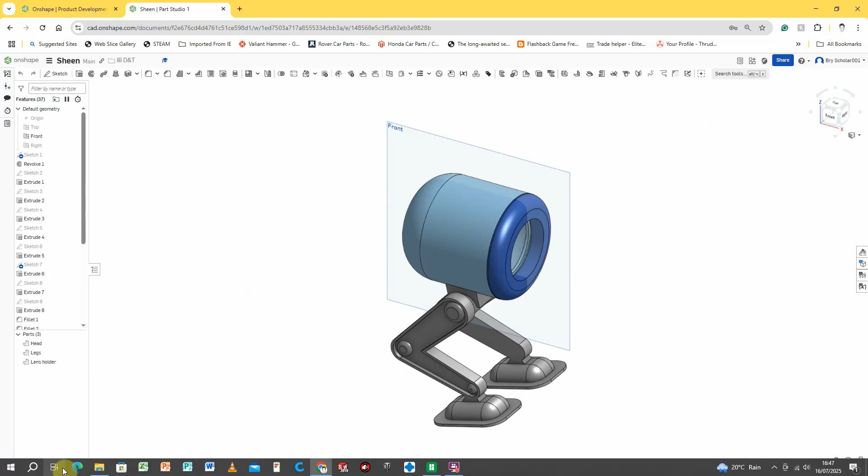In this video we're going to be taking the 3D model that we created in Onshape and putting it into the Bambu Labs slicing software so that the model could be 3D printed. So I've opened up Onshape and opened up the model that we had worked on previously. If you've left it on the drawings, go back to the Part Studio.

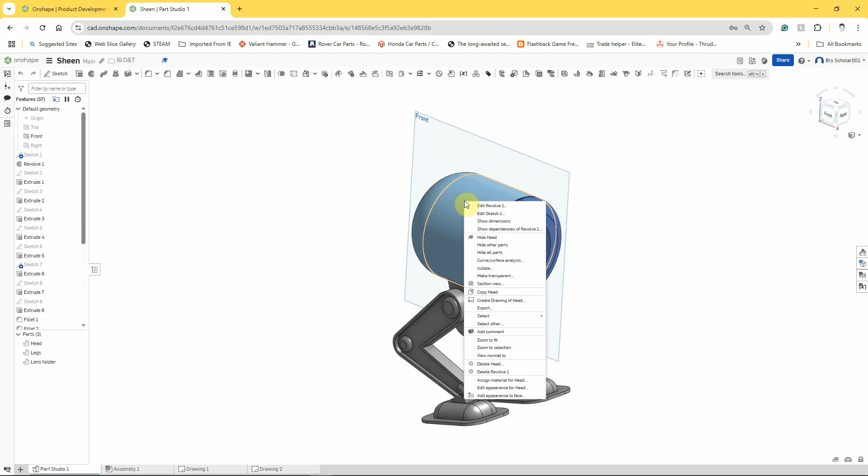And here's the model. So the first thing we need to do is export these model parts into files that the slicer software will understand. So we're going to use STL files, stereolithography files. So we can just right click on the part and select export.

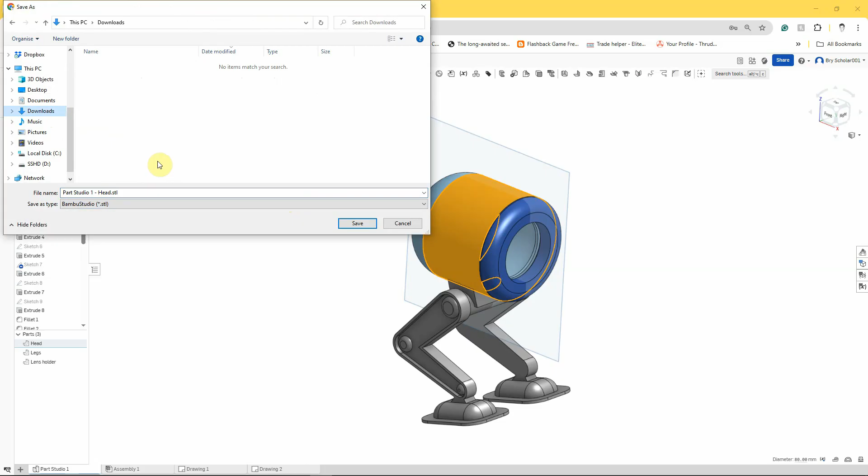And you can see that it tells us what the Part Studio was and what the part is. STL is the format, binary, millimeter, fine is fine. We can just leave the defaults there. We're going to export that and we're just going to put that into downloads and click on save.

And we can do that with the other parts, and I can also do it over here, so I can right click on legs and export and save. And do it again for the lens holder. So right click, left click on export, leave all the defaults and export that and save it.

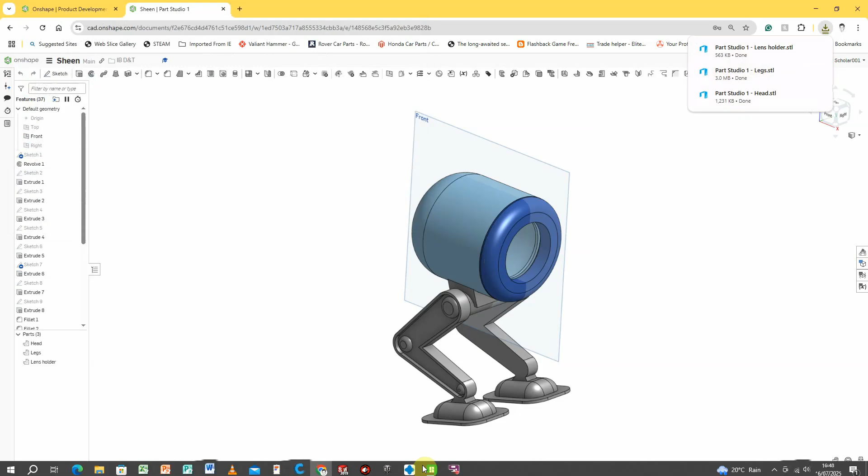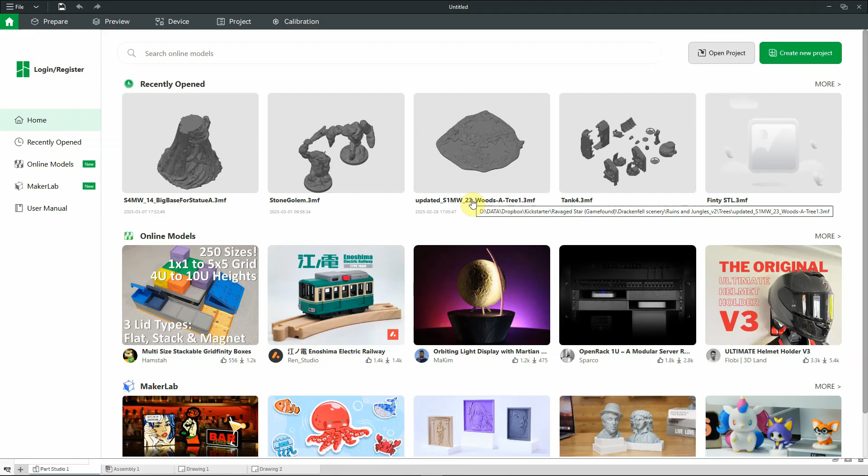So we're going to switch software now. We're going to go to Bambu Labs. I've opened it up. You would need to install this on your own device, or the school computers will have it pre-installed for you. Open up Bambu Labs software, and you're quite often greeted with this. Sometimes you get messages about upgrading and things like that. I'm just going to click on prepare, and that takes us through to showing us the bed.

Now the first thing to check is that we've got the right machine and the right materials set up. So we need to make sure we're on the Bambu Lab X1 Carbon with a 0.4 nozzle, and that we're using a textured PEI plate. There are some different choices, but you tend to find once someone's used that on the machine, the defaults will go to that. But it's just worth double checking, otherwise you might try and print something and it won't work on the printer.

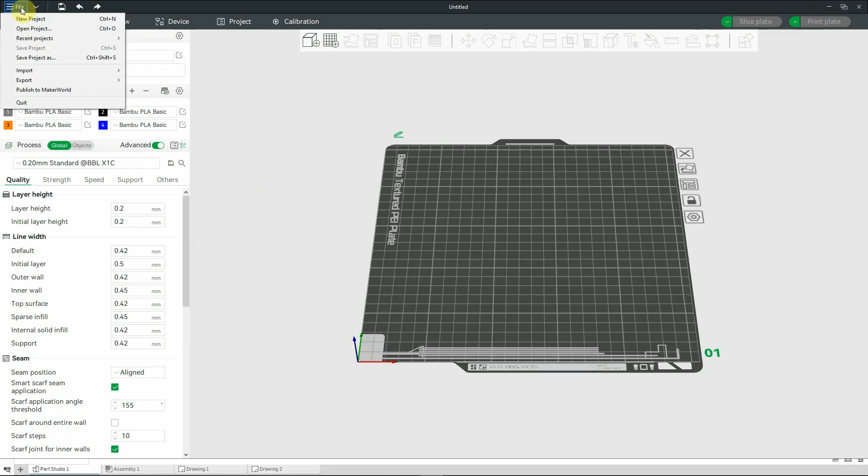So this is the bed, the build plate, that part goes into the back of the machine. This is at the front, and it shows where it will do a little nozzle check when it's printing. So we need to get the parts in here, and we can do that one of several ways. We can drag and drop them in, or we can go to File and import the STL files. So if we do that, we can actually select all three at the same time and go open.

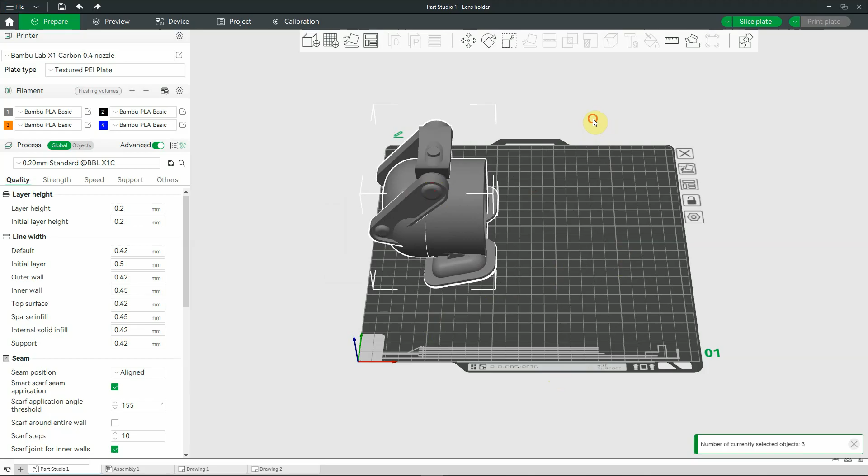If you do that, it says, do you want to create a single object with multiple parts? In this instance we don't. Sometimes it can be useful. So there are the parts, and they're all on top of each other. So I'm just going to left click out the way to deselect them, and then I can drag the three parts around separately. Unlike Onshape, you have to hold the left mouse button down to move this around. Those are the parts. What we'll first of all do is lay them down on the bed.

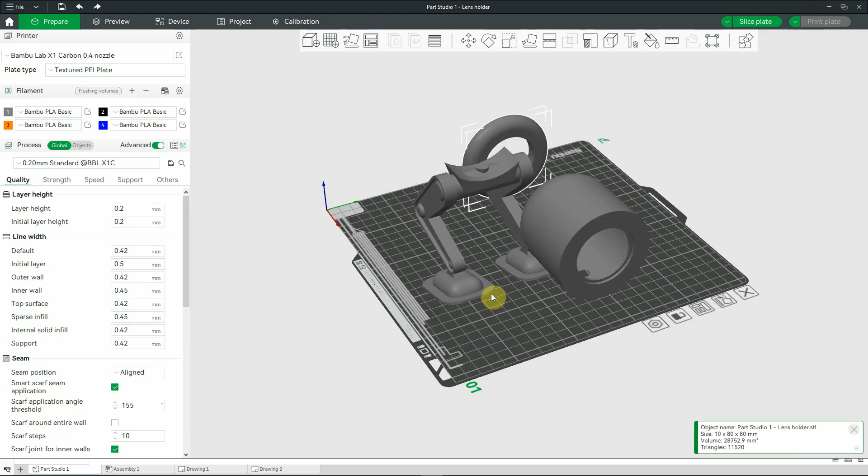Now when we're printing, there's quite often a compromise between strength, accuracy and speed. So depending on what we're after might depend on how we will lay the parts out, the orientation of the parts. Let's take this part as an example, the head. I'm going to click on this tool here, which allows us to pick a face to lay it on.

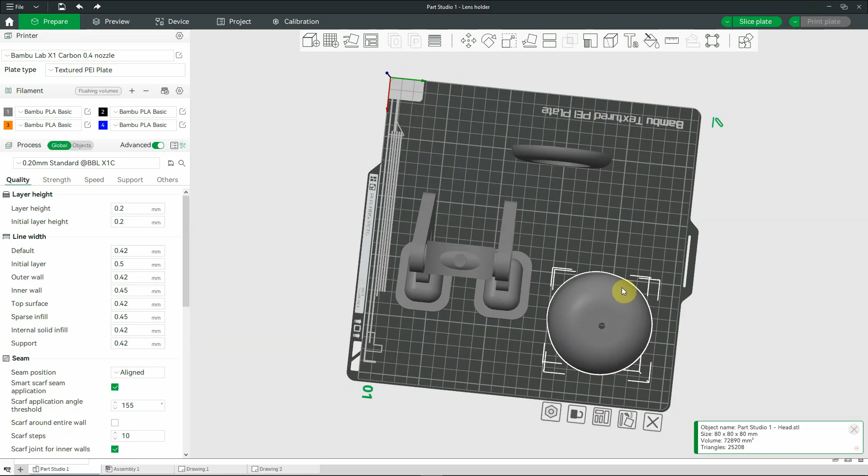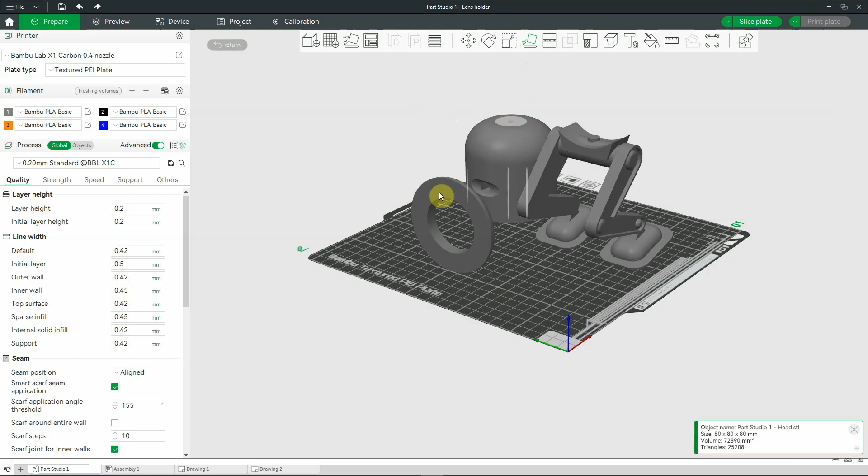It makes sense to put it down facing downwards, because we'll get the most accurate circle then. But what it does mean is it will be in lots of layers, and if it was going to break, it would break across these layers. But actually the material's quite thick, so that's not a problem. Likewise, it makes sense for this to be nice and accurate, to print it with this flat surface on the bottom. So again, I'm going to click on lay on face, select that part, select the face, click away, and I'm just going to scooch that over there, just dragging it.

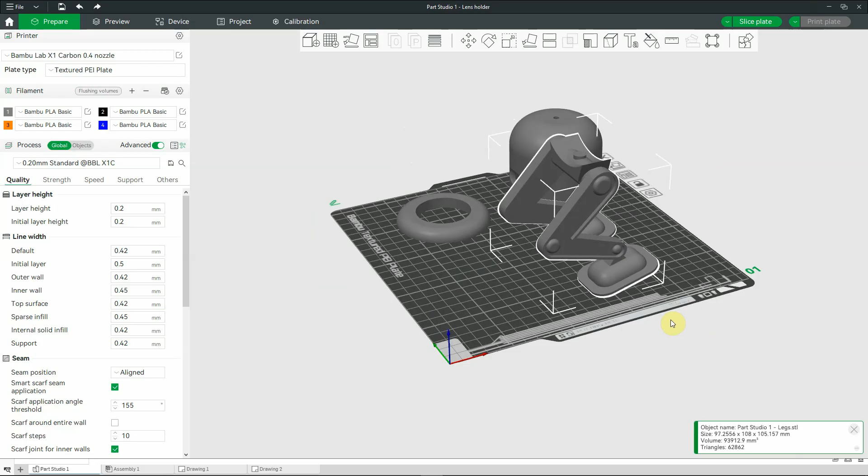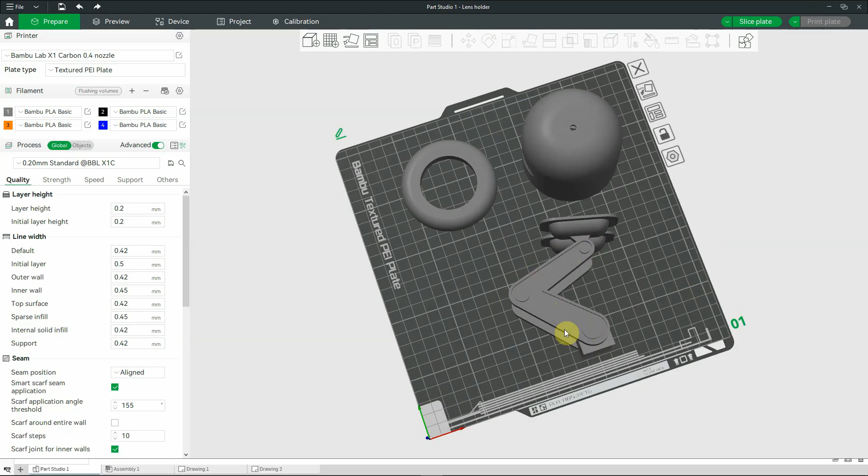And then the feet, this is a little bit more complicated. If we wanted to try and get maximum strength on these, we would probably want to orientate these so that they're lying on their side. So we'd probably want to print them in this sort of orientation. The reason being is that the printer will go around the profile of the legs, and this will give us a strong shape. However, for the purposes of speed and making things easy, we're going to print them with the feet flat on the floor.

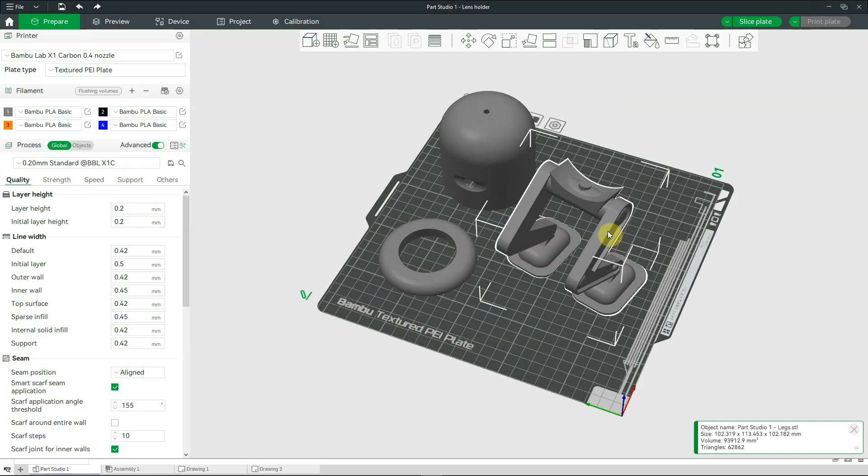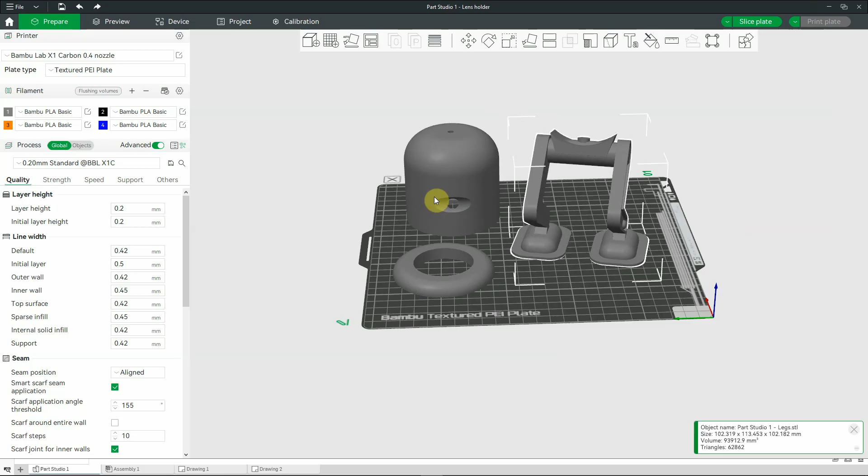So we'll do that, and I will just drag that over out of the way. Now you can see that sort of twisted around slightly. That doesn't matter really, but what this does mean is as it's layering, it'll be printing across these. Now if it was printing with layers going this way, this would be quite weak. I suppose the weakest part on here is going to be the layer across there, where arguably the feet could snap off, but this will print relatively quickly for us, and we're not going to be knocking this about a lot.

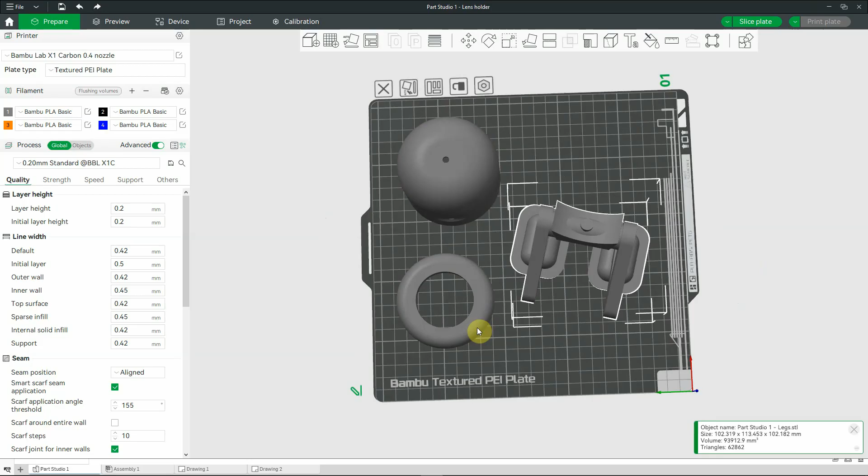If we were doing these as separate parts, perhaps if we were articulating them, in that case we might actually lay these down and build them on their sides and do them separately, but for the purpose of this, it's absolutely fine. So we've got our parts. We can just move that around with the left mouse button and look down, make sure that we're not interfering with anything. I suppose we could spin that around slightly so it looks a bit squarer. It's not going to matter, it'll still print okay.

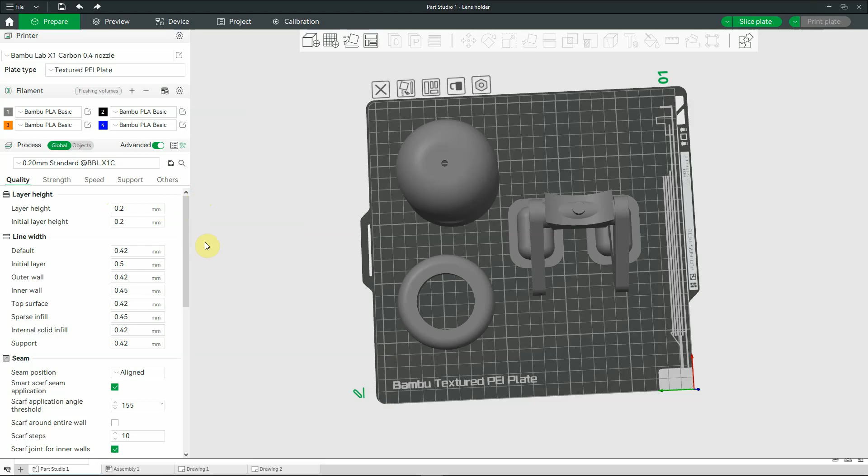So let's go over to the settings. Pretty much the default settings will work. In school we tend to use Bambu Labs PLA Basic as the material. That's a biodegradable material, and that works really, really well. It gives us some really good quality prints. We would normally stick to a layer height of 0.2 of a millimeter. We could go to 0.1 if we wanted a slightly smoother model, but that's absolutely fine. And pretty much everything else we can keep the same.

If we go to strength, we've got wall loops. Now, a 3D printer doesn't print things solid. It prints things by doing a skin. So if we take, for example, our head here, it will print an inner skin and an outer skin, and then it'll do a partial fill on the inside. And the standard fill is usually about 15%. So you can see on here, it's going to do a grid infill of 15%. That uses less material, but still gives a good amount of strength. If we want something really strong, we could increase the fill percentage.

And likewise, we can have more wall loops. So it's going to do 2 loops. It's a 0.4 nozzle, so the walls will be 0.8 millimeters thick. If we wanted a really strong part, we could perhaps do 1.2 millimeters, or go up to maybe 5 wall loops. So we'd have a 2 millimeter thick wall or skin for the part, but we don't need it for this. So we'll again leave it at the default. Again, the speed we can leave in its standard configuration, but support we might want to add.

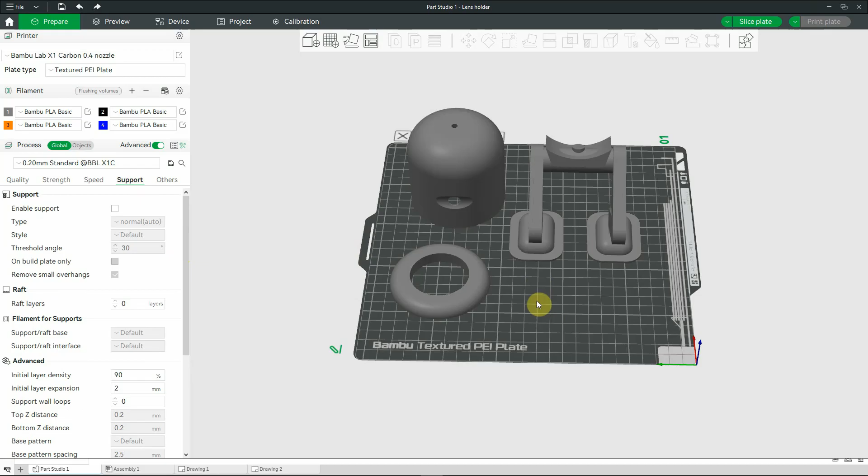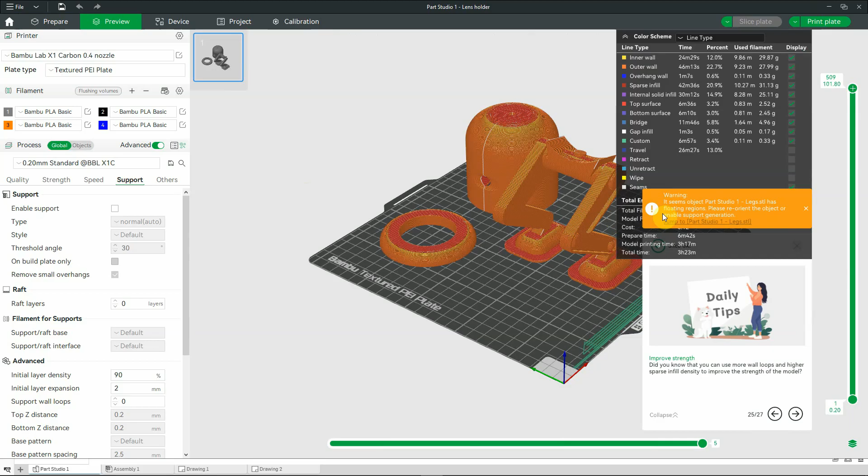Now, I'm not going to do the support first. So I've left support disabled, but let's do a preview. What this will do is calculate the toolpath of the nozzle on the 3D printer for squirting out the plastic and making the part. And you can already see that the legs have floating regions. It doesn't like the fact that there's bits that would be in space, and so it's unlikely to print successfully. So if we go back to prepare, to support, what we tend to do is use the auto-generated tree supports. This tends to give us a support that's easier to break away and leaves behind a better finish.

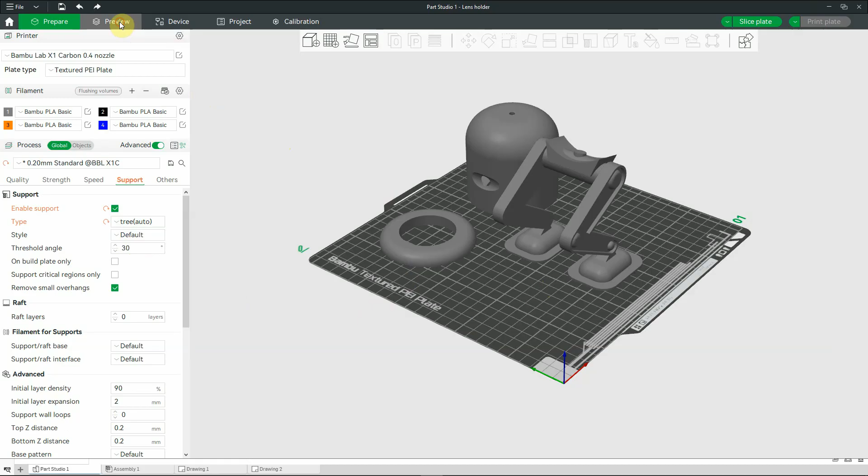So let's see if you can spot the difference if we go back to the preview now. It should be quite obvious on the legs. There may be a little bit of support inside the head as well. This will take a little bit longer when it's printing, because it has to print the support as well as the actual parts, and it will use slightly more material. And there you can see in green it's added in some supports. These should just break away. And that's basically it. That's that file created.

So to get this to print on one of our printers, you now export it to a memory card. For the purposes of demonstration, I'll just show you on here. I'm going to go to File and Export, and I'm going to export a plate sliced file, and I'll just put that in Downloads for the moment and save it. And that file then can be transferred ready to go into the 3D printer.

It gives you all the information here, what it's going to take. It's going to take a total of 5 hours and 35 minutes to print. It's going to use a total of just under 165 grams of material. The reels that we get are a kilogram, so 1,000 grams. You can see that some of it is for the model and some of it is support. And there's about 6 minutes preparation time. By default, we get the machines to do a print test with the nozzle to make sure the filament's coming out, and also to do bed leveling, because it ensures more successes with prints. We get very few failures.

But that's it. That's how to export the parts from Onshape and import them into the Bambu Labs software ready for 3D printing. Thanks for watching.